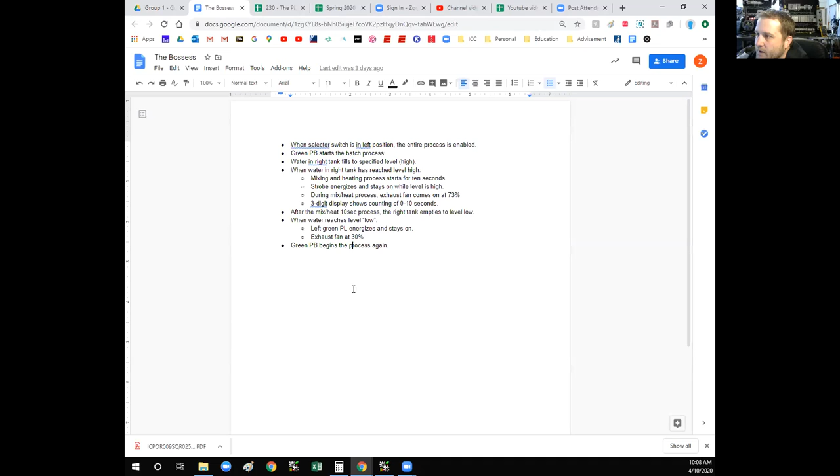I'd like you guys to come together as a group and write something up like this, and we'll go over it next Thursday. Try to get a few lines of logic written down so we can go through it quickly, because we need to get caught up with the first two groups.

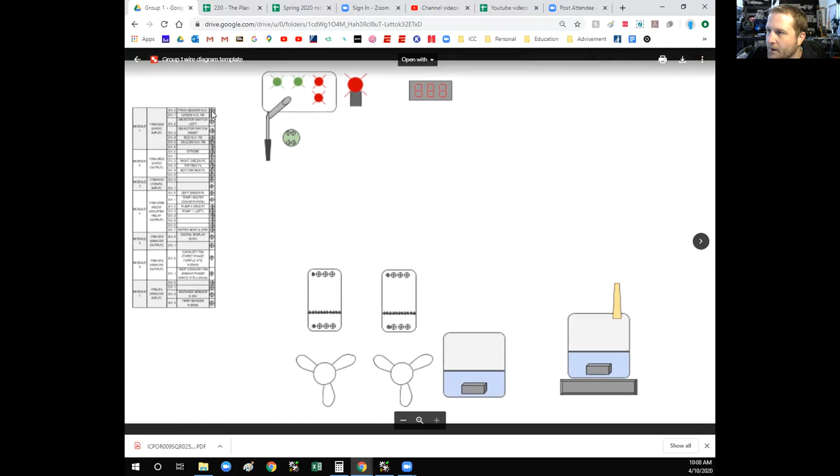When you open it up in Google Draw, you should be able to zoom in quite a bit. Google Draw is pretty easy to use. There's some shortcuts that are handy, like Control Alt plus, I think, is zoom.

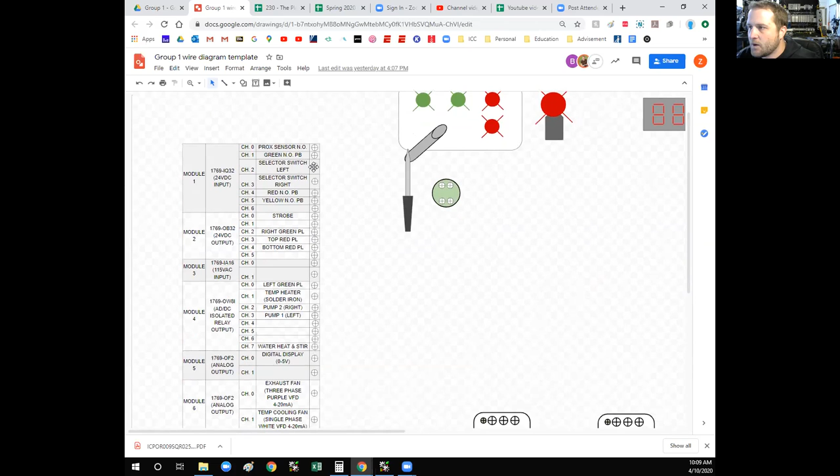You can zoom on this stuff and draw wires from the screw terminals on the PLC. And I left the drives open, so that's another thing. I'm going to add pictures of all this stuff so that, for this drive, you can see what the part number is, so you can see where to land the control wiring on here.

I'll get all that stuff loaded up after class today. Make sense? Okay, you should be able to look at the pictures and see what I put on here to use as a template. You can use this as a template for your wiring diagram.

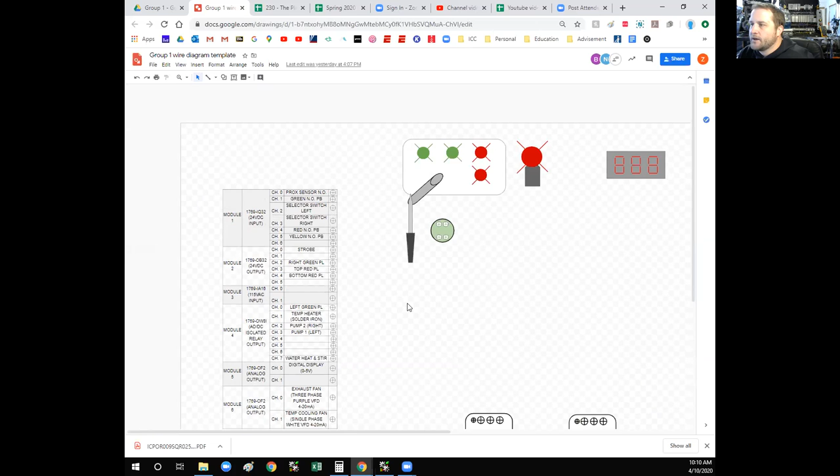So would you like us to save a copy of that on our own? Yeah, I mean, I would if I was you, but you can just save it in your group's folder in the shared drive if you want to.

Okay, so where is it at? I'm in 230, the shared drive. Yep. Electech 230, yep, and then your group 4. Yeah, wiring diagram template.

Hey Zach, you guys can- I'm not seeing it. Okay, whenever I'm in 230, I just have 230 examples of P&ID. Then I have group 1 and group 2. Those are the only folders showing up.

Oh, really? Hey Mackenzie, go to shared with me. Go to your Google Drive. Yeah, I'm on my Google Drive. Then go to- I'm at shared with me. Zach's class shared, and then I was in 230.

You don't see a group 3 or 4 on there? Let me try to reload it, but you go to Zach's shared class file. Yeah, and I'm not seeing it. You went to 230? Because I have them all here.

But Zach, the only thing is you need to share that with us. You need to let us edit that. We have the view only version. Okay, and that's what I wanted to know. So I can go here and request edit access, and I can send that to you. Or you can probably go in and change the settings on the share.

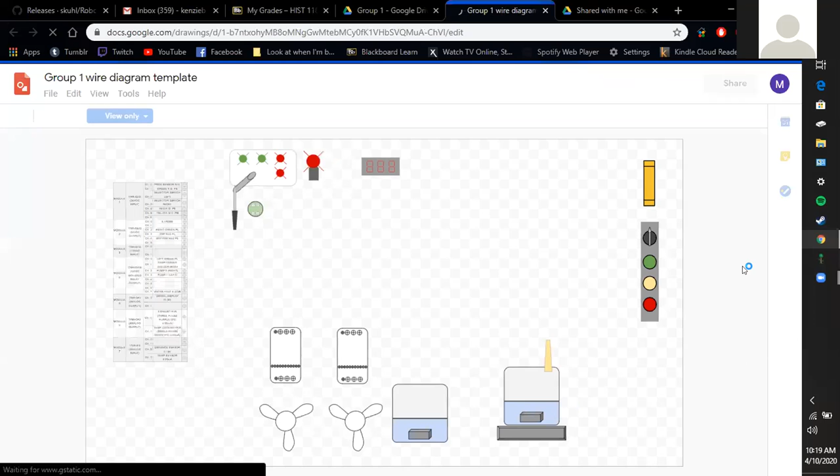Whenever I first opened these, that wasn't there. Well that's not even what I see, because there's supposed to be 3 and 4 on there too, right Zach? Yeah, you must have not shared it with Mackenzie, or she's on a different list. That's so weird.

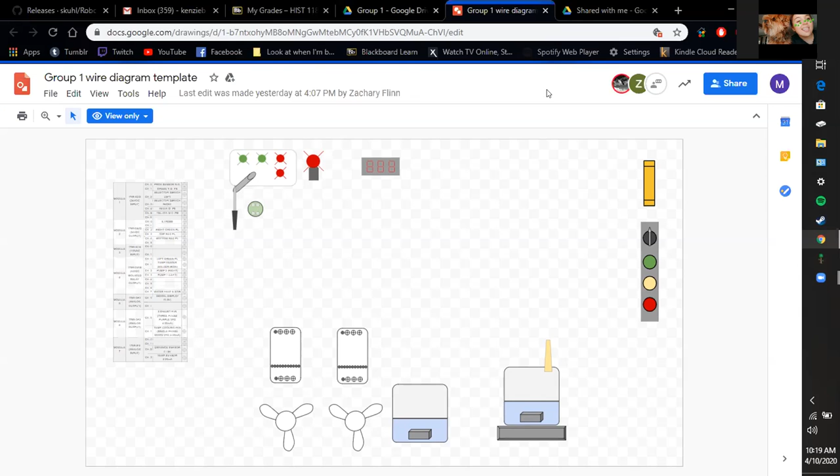And you're logged in as MJ102A. Yep, this is my Google account, cause I have my other one over here. Go back to that last screen. Okay, oh my gosh, these tabs are weird. Okay, this screen, group 1. You see where it says name on the top right? Go up, yeah, the icon next to the eye with the circle on it. To the right, one more, one more, click that. Nope, just 2. Yeah, I don't understand why that's not coming through. All right, well I'll look into that after class today, but at least you have access. You can make a copy of the wiring diagram and edit it if you need to, okay, and then get with your group and come up with a process.

Okay, all right. So where were we? Would that have been the 6th? What are we doing today? I forget, we're going to keep going on the temperature control deal.

So let's look at what we have first. And then Jacob Kaiser volunteered to do the programming today, with your help of course. Isn't he at work? No, he's here.

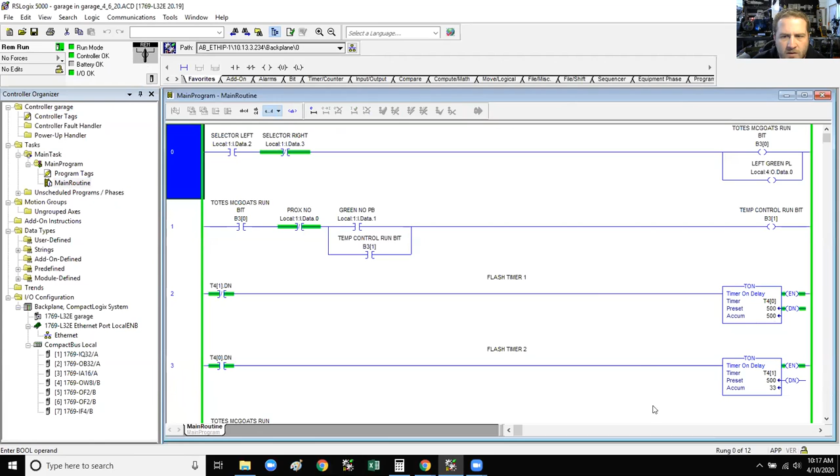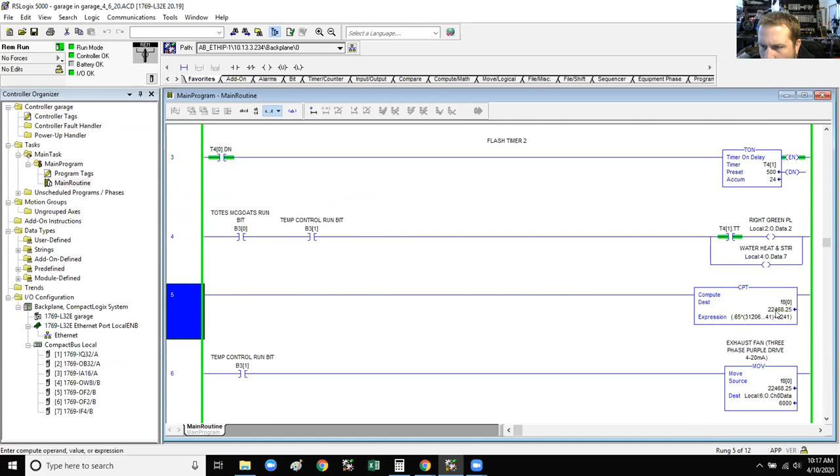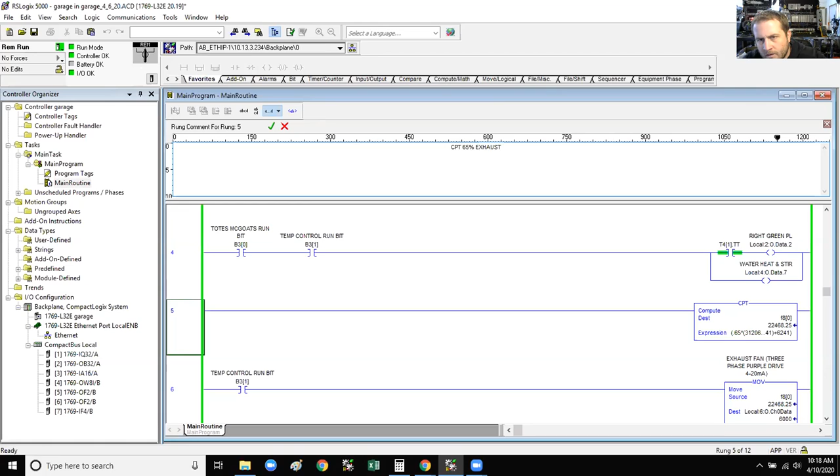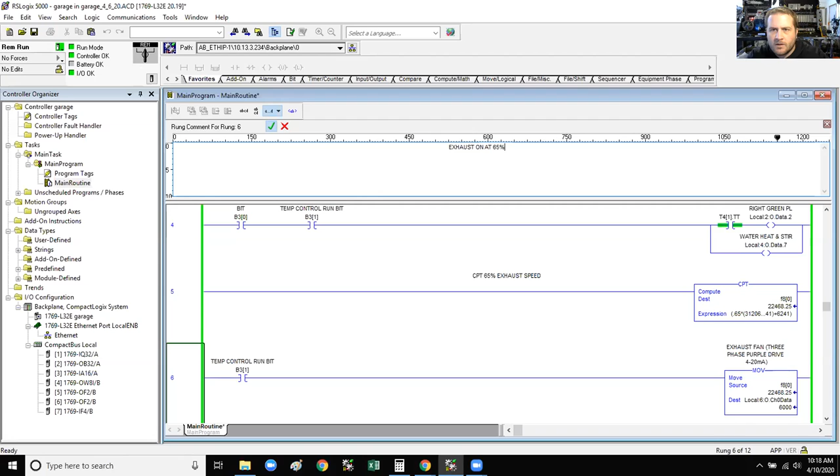So selector left, run bit, green push button. Temp control run bit. We've got a compute function in there. So this is just... we need to start putting in rung comments here. 65%. Where's this?

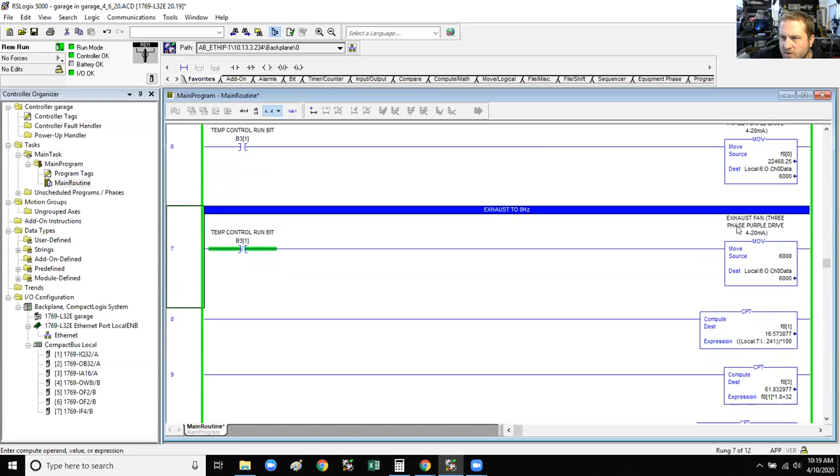Hey Zach, what's rung 8 computing? That's taking F8[1]... right, what's that one? Minus 6241, divided by... that's getting the percentage. What is F8[1]? I thought that one was the temperature. Oh, the destination is F8[1]. So local tag 7.

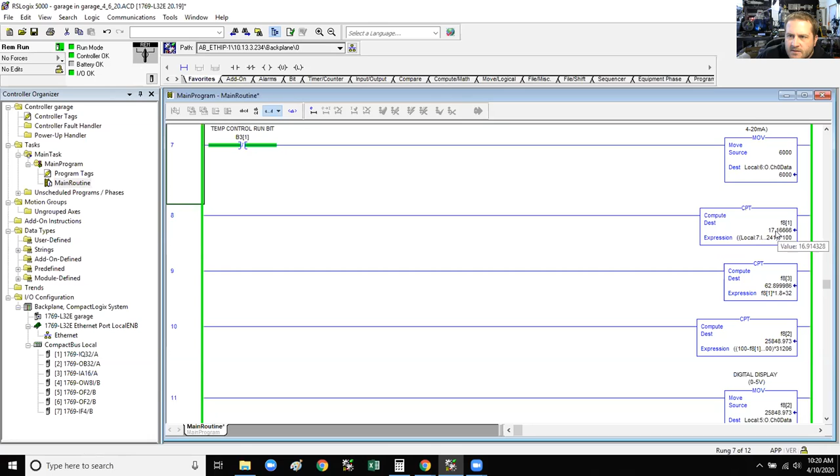What is this one? It's either the temperature or... oh, this is degrees Celsius. Okay, right? Yeah, I thought that. Then line 9 converts it into Fahrenheit, I'm assuming. Yeah. Are you guys hearing me all right? Yeah, we can. Oh okay, thought Zach was either ignoring me or... I hear you, Don. All right, I hear you, way to call him out Don. Sorry Don, I was sitting there telling you I thought it was the temperature. You just weren't responding.

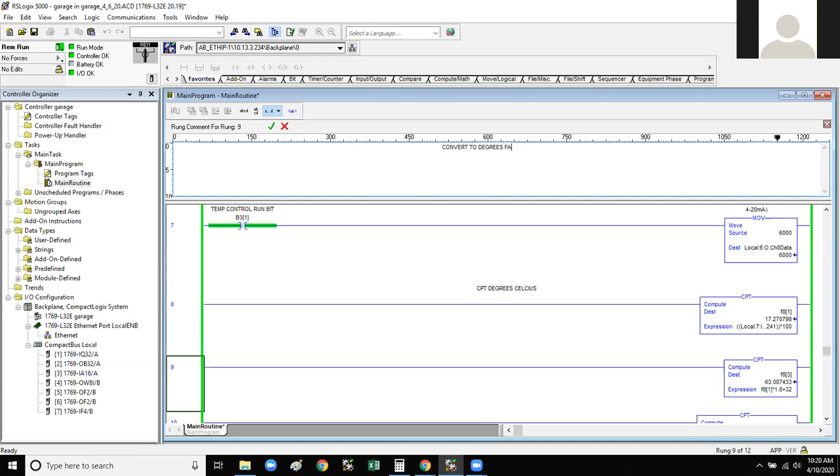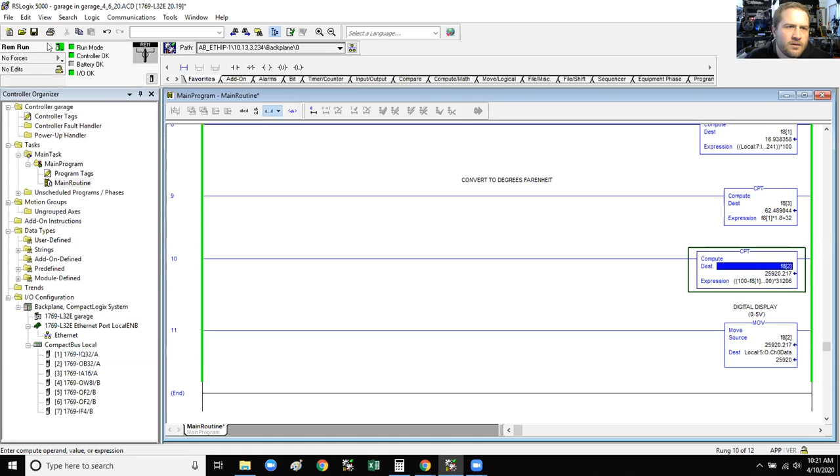Okay, so we're taking F8[2], we're taking 100 minus degrees Celsius. Oh, so this is inverting. Okay, this is inverting the degrees Celsius. Whoops, crap.

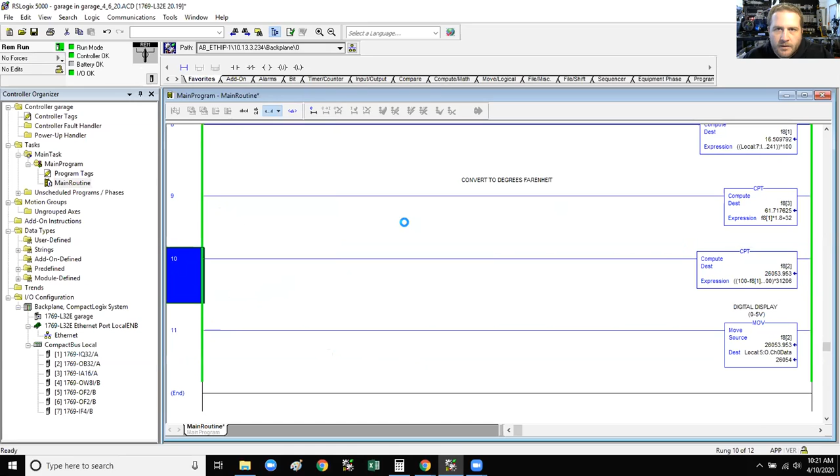Who did you get your internet from? Me? Yeah. Telstar, why? No, I've never heard of them. I was gonna suggest MTCO. Why? MTCO is fiber optics, and it's a company I switched over to, and I've had really good internet with them ever since I switched. Well, that's good.

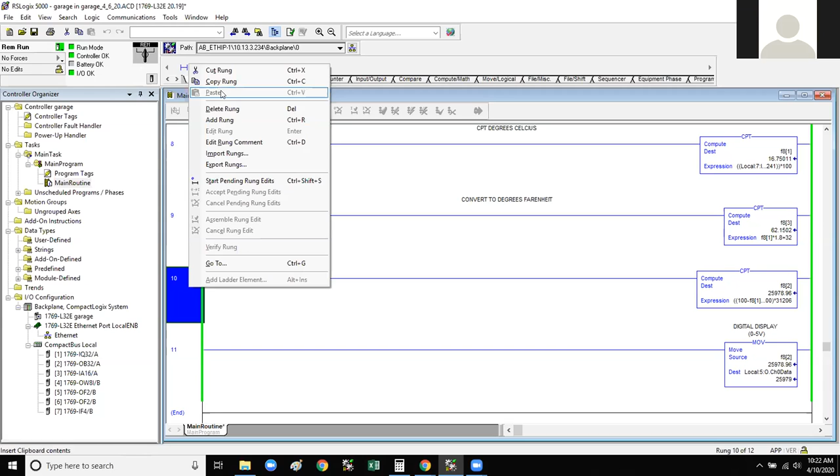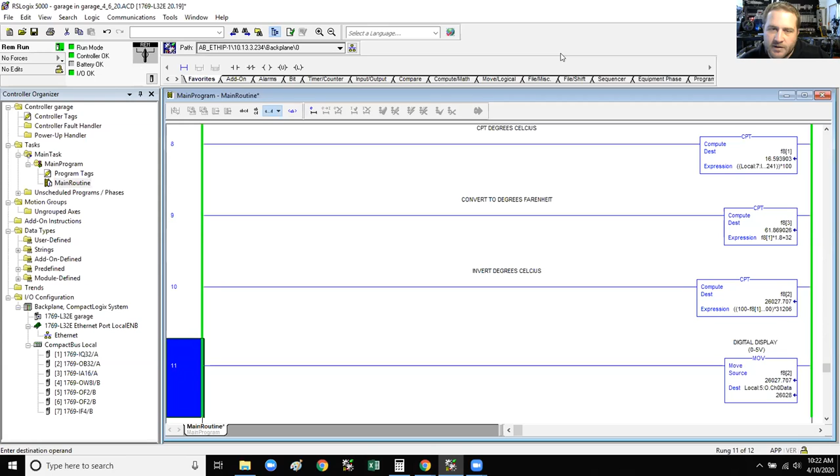What do we have to invert that degrees Celsius for? So the digital display takes 0 to 5 volts, where normally you'd have 0 degrees at 0 volts, 100 degrees at 5 volts. But this one is backwards. Oh, so when you put 0 volts on it, you see 100 on the display. And when you put 5 on it, you see 0. So you have to invert that thing so that way it still reads correctly. Yeah, makes sense.

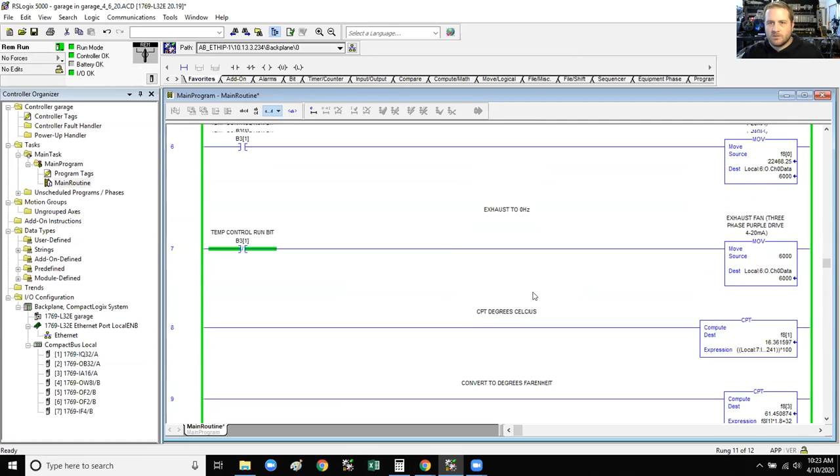All right, so this thing's running. And it is showing 18 degrees Celsius, which is pretty close. Program's showing 16.5 degrees Celsius.

So, good to go. So what else? What else should happen? We turn selector left on, the green pilot light comes on. Cool. Where's that turned on? I can't see that, I don't think.

Better? Yeah, this is off. Oh, I see. Okay, selector left, and then I hit this, and the heat and the stir are coming on. And the green pilot light is blinking. So that's where we're at so far.

Do we have a stop button in there anywhere? Or is it just the selector switch? I'm pretty sure you added a stop somewhere in rung 1 or 2. Oh, it's the prox. Yeah, it was the proximity switch.

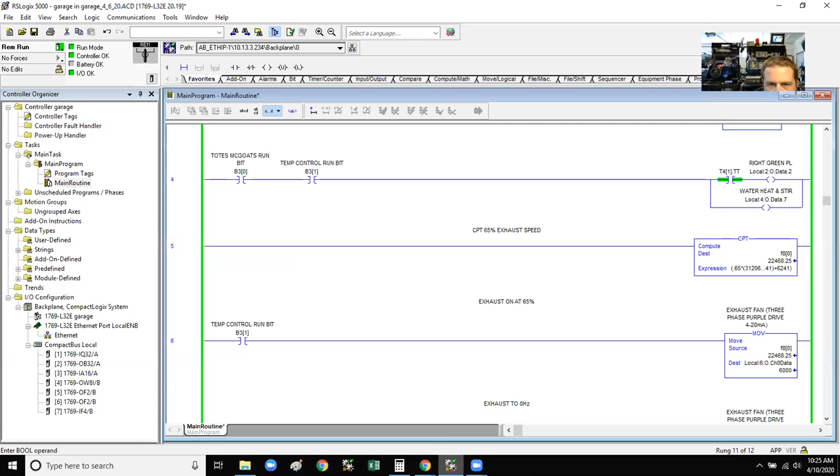Okie dokie. There, Jacob? I'm here. All yours. Have fun.

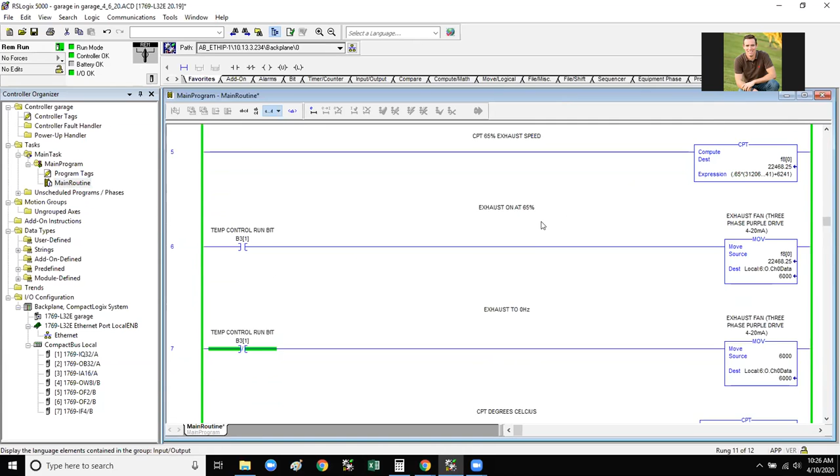What do we got to do in the process yet? What's the last thing we did? Last thing we did was got the digital display working. So right now we have to get the... we have to get...

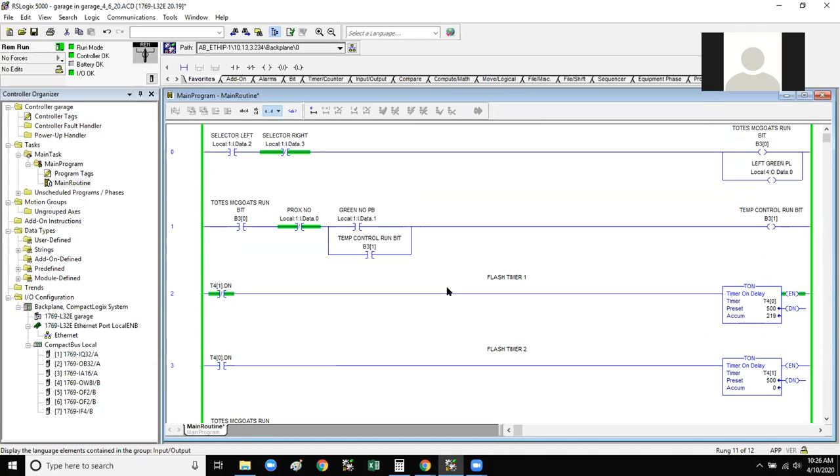We have it in Fahrenheit, right? I think we have it in Fahrenheit, so we just need to make a function that turns on the red pilot light. I'm just reading the next step word for word.

So the digital display shows the temperature in Celsius from the thermocouple in real time, and then the next step would be whenever the heater soldering iron is on, the bottom red pilot light flashes at a rate of 0.5 seconds. Shouldn't we get the soldering iron and the cooling fan in first, though?

Or would you rather go with the... Is the heater on right now? No, we don't have a heater function or a cooling fan function. When do we want the heater to turn on?

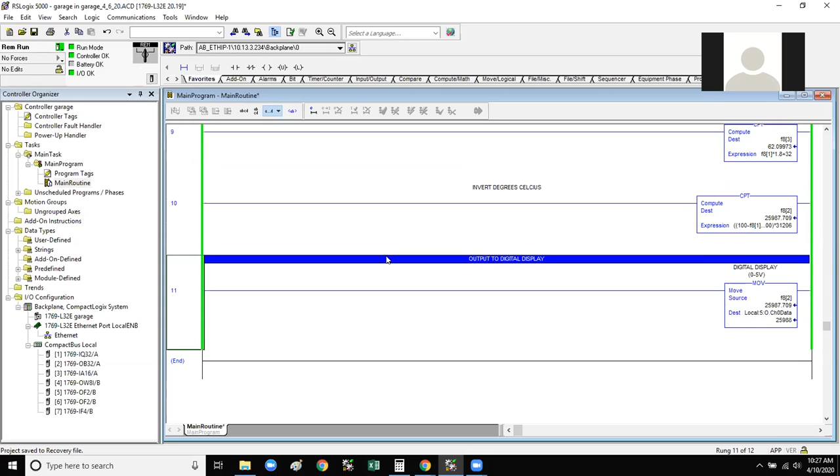When it hits 79 degrees Fahrenheit, we want the heater to turn on. What is it at now? It's there, right now it's at 62 or 61 degrees.

So we want the heater to be on right now until it goes up to 72 or 79. What? 79. Yeah, so the heater needs to be on right now. Well, yes. Can I put my 2 cents in? So we need to make a rung with the heater output.

I think that is a no. I missed it, what was the no? Please add your 2 cents, Zach. Zach asked if he could add his 2 cents in.

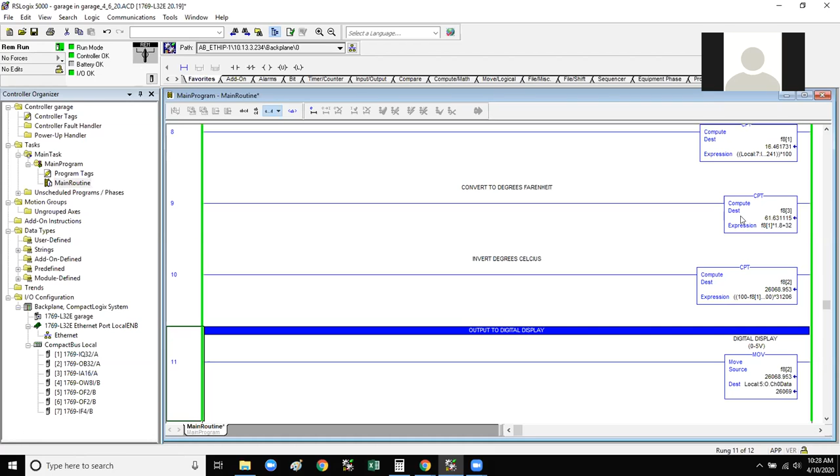I would do a couple compute functions to calculate what 80 and 120 degrees Fahrenheit is in Celsius.

Why wouldn't you just use a calculator for that, though? You can. Somebody can do the math, and we can put those numbers into an F8 if you'd like. Should we do that together on a whiteboard? Sure, all right.

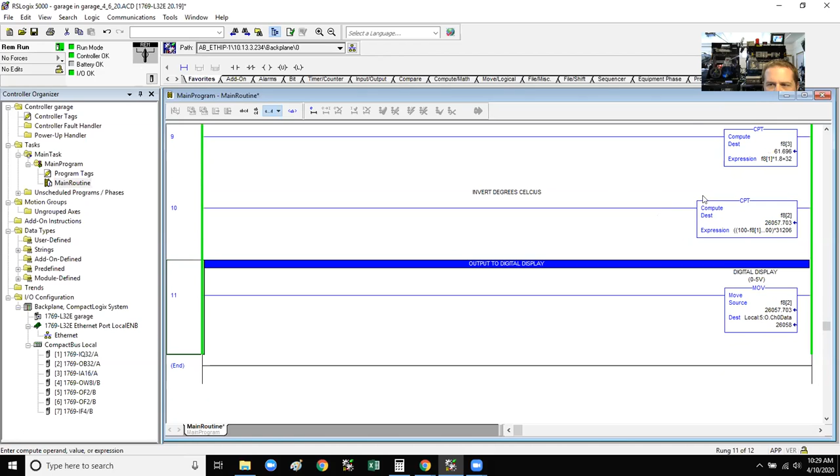I got it, Jacob. You don't have to do anything, just let me have the mouse. Okay, he's like, I don't wanna.

So what we want to do is have 2 F8s. I don't know what the next numbers are. 4 and 5. Uh-huh. And F8 5.

We need to figure out what 80 and 120 degrees Fahrenheit is, right? Yeah. So, 0 to 100 degrees Celsius is on the PLC going to show you 0 to 31206, 6241 to 31206. Those are the numbers, right?

Yeah. Hey Zach, what? I cheated. How'd you cheat? I used Google, Fahrenheit to Celsius, they have a little app that just tells you. So Celsius is 49 degrees. 49? Exactly? Well, no, it's...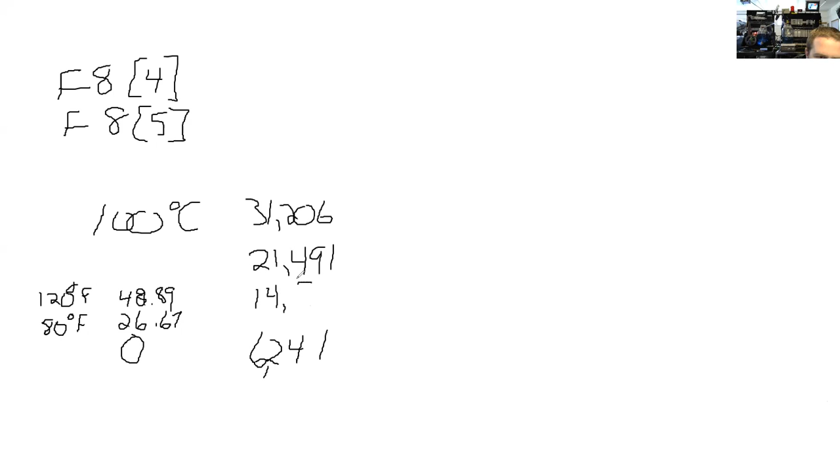Okay, well thank you for saving us a ton of time because I forgot that we did that. So these are the two numbers we need. Got them written down, Jacob, or somebody got them and you can tell them? I got them written down.

The 21,491 is the 120 degrees, and the 80 degrees is the 14,548. So all we're going to do is go into the tags.

We should probably put a rung in there with move, so that every time you kick this thing on, you're moving these numbers into F84 and F85. Once F84 and F85 are designated as these numbers, then you can use your less than and your more than to control the temperature. Make sense?

I'm not sure why we got to put that into a tag, the 21, just so that we have it for other uses?

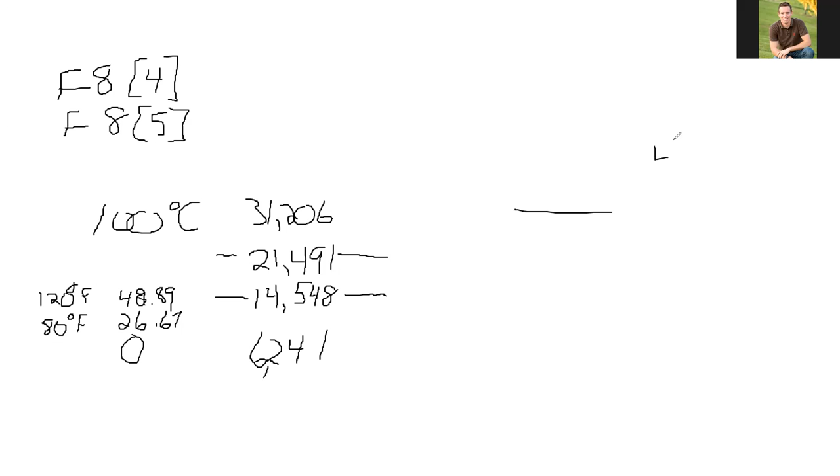Well, because at some point we're gonna have a less than function, right? I don't remember the number, LTH or something, less than. So we're gonna tell it if the input...

I guess we don't need to assign them, do we? I mean, we need to put the input. We'll have to have that float symbol, the F8, and then we'll just put in: if it's less than this, if it's less than 14,548, make that rung true, and then move it, move that number to the heater I guess.

Or no, we'll have to do a one-shot rising, so that way if that rung comes true, it'll turn the heater on, because the heater's a discrete output, right? Yeah.

Okay, the way I'm understanding it is the less than bit, when it hits 14,548, below it, it'll turn on. And then we can put another one for 21. So is your input one the temperature?

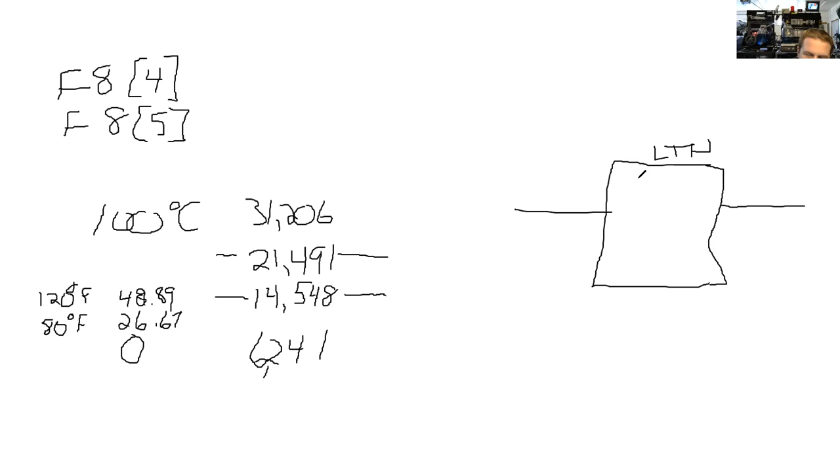Is your input less than 14,548?

Is it just me or your handwriting got a little worse, Zach? Sorry, I've been drinking.

So if this is true, if it's less than 14,548, then this rung will become true. Basically we just need to have an output then, and then we'd have the output of the heater, right? Yep, then that'll stay true.

That's going to have to be, we're going to have to have that stay true though, because as soon as that rises above 14,548, it'll turn the heater right back off. So we'll have to have that stay on somehow. We'll have to seal it in until it gets to 21,491.

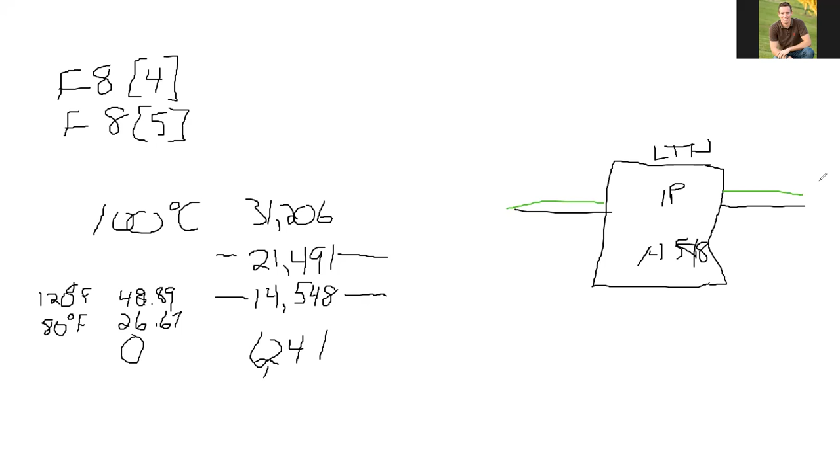And then we'll have to turn it off then. That actually makes sense, use the higher number for this. Or somewhere in the middle.

I don't know, we'll just have to write it and see how it behaves. There's going to be some kind of lag there. Because if you have this thing... no, that should work.

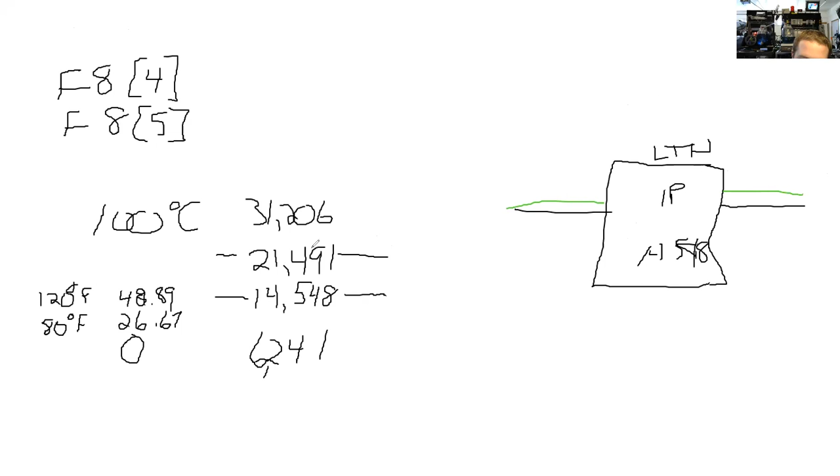When do we put another function for the 21.4? Well, you're going to have another one that's more than. So if you have, if it's more than 21,491, it turns the fan on at whatever percent that is.

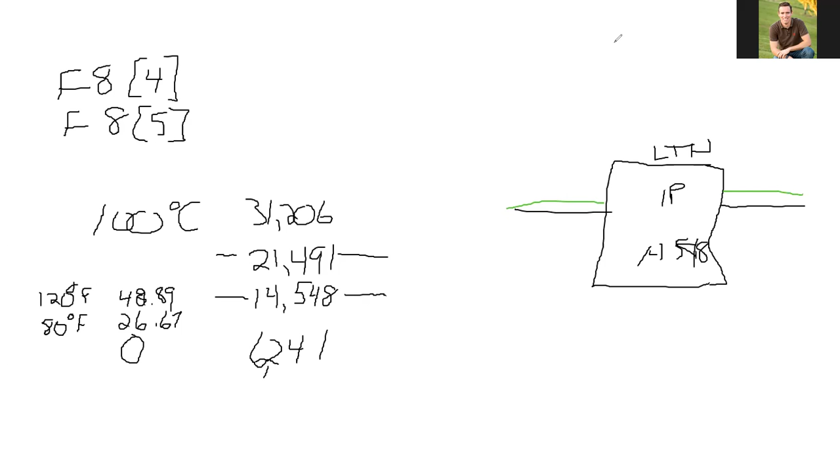All right, right? So Zach, how... I have done it in the past in the 230 trainer is I just made it so that once it got, I use that less than symbol to turn it on.

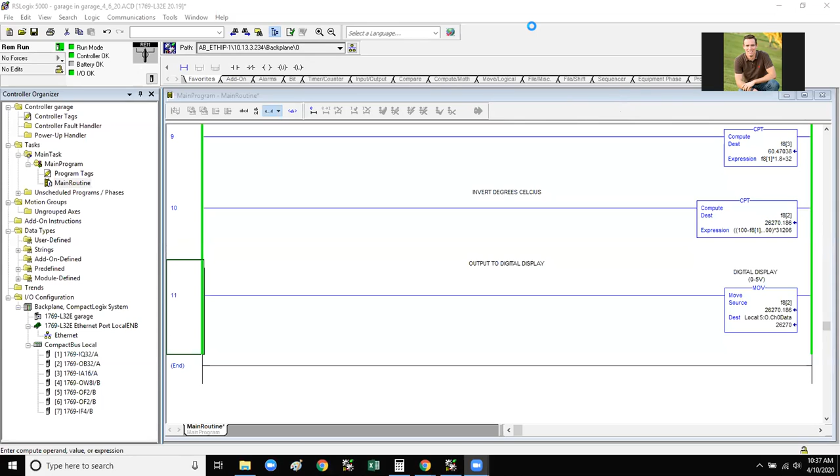Once it's on, I actually put a sealing contact around the entire less than symbol that would bypass that less than until it got up to the high limit, and then I'd have an examine-if-open symbol in there, and once the high one was true, it would then drop that whole low rung, and it would shut down the discrete output. I think that's how I did it in the past, so I don't know if that would work. I can give it a try, or how would you do it?

Let's try it, a lot of times you have to put it into action and see how it behaves. Okay, so we don't have an output or anything yet for the heater, correct? Nope. Okay.

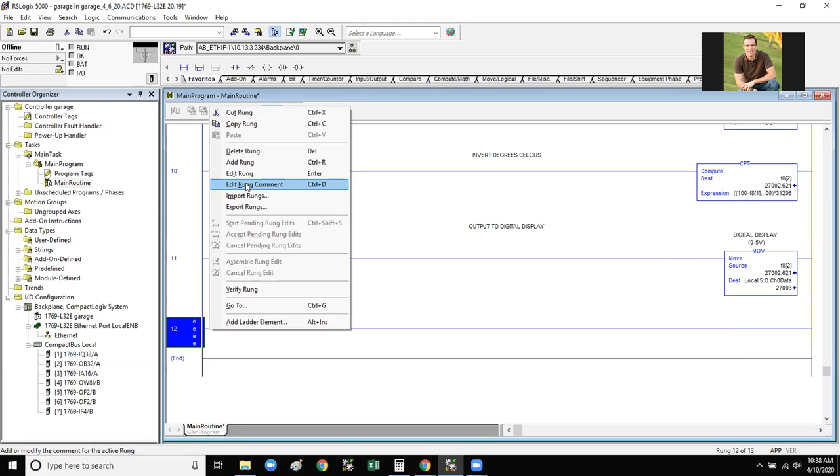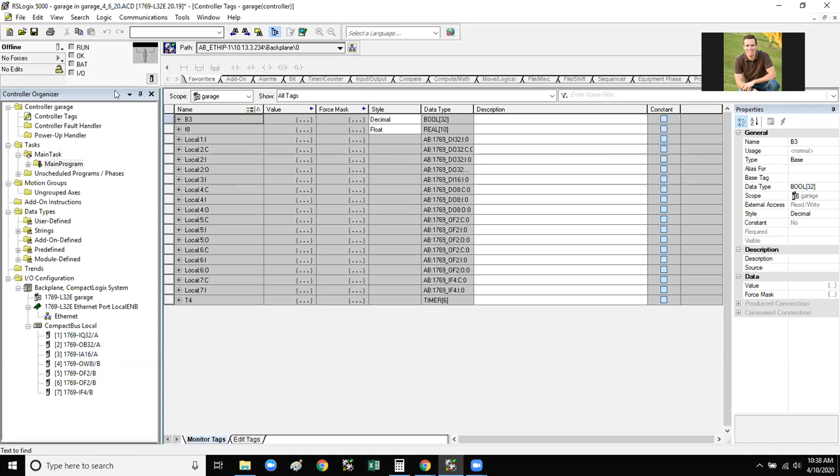Which output is that now? Actually, scratch that. How do I get back to... How do I get back to my main program?

Drop down on the main program. Main routine. There you go. So if I go, is there a way we can do that controller tag? There we go.

All right, now help me out, guys. Which discrete output is that heater is? I don't really know that at all. 4-1.

So now it's gonna be this one right here. So this one here? Yep. Yep. And heater, okay. Now we go to.

Do we have like an e-stop control bit we've been putting on all these rungs that are running things, or are we just not worrying about that for now?

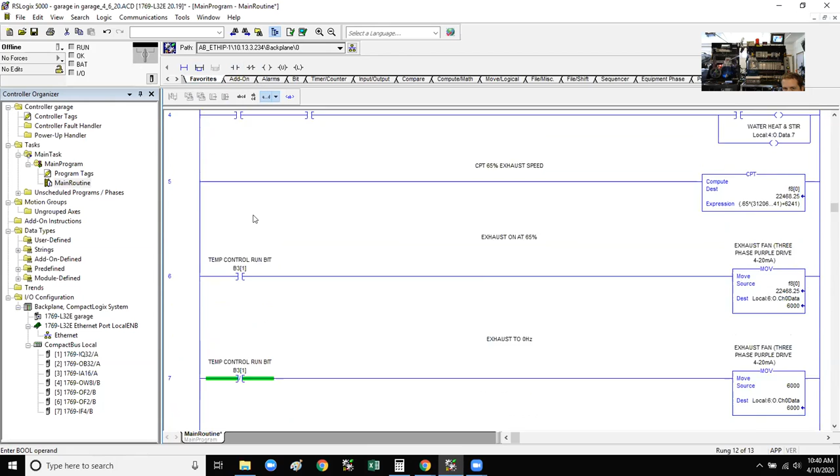Well, you don't want that one. Yeah, you're right, I'm always right. I'll delete that, delete that instruction. Because that e-stop's probably normally closed.

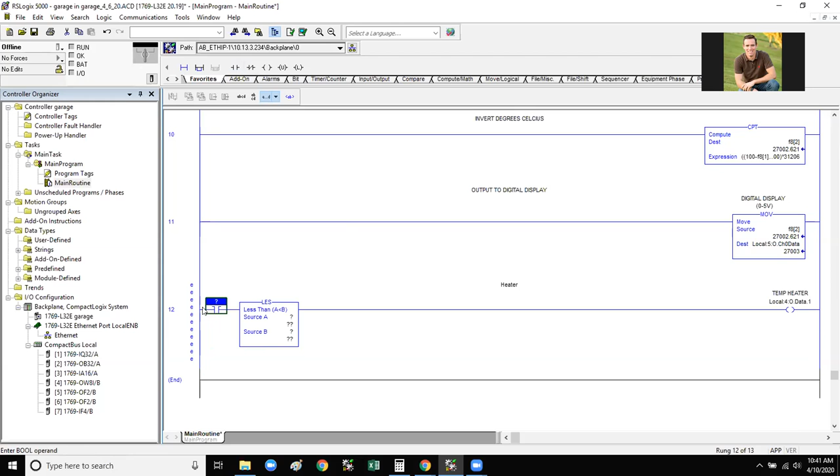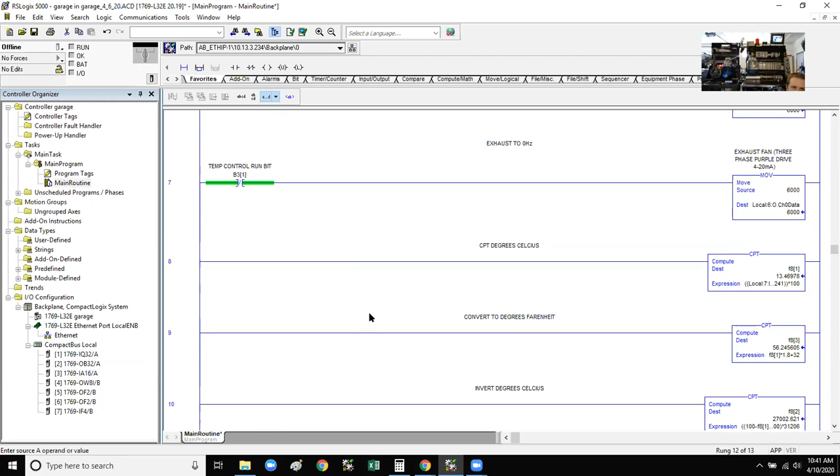Oh no! There we go. Is that right? Yeah, but go back up to that rung you dragged it down from. Make sure you didn't move the whole thing. In here. Okay, all right, you're good.

All right, now our source A is going to be inverted, not that one. Compute degrees Celsius, this one right here, right? This f8[1]. Am I thinking right on that? Nope.

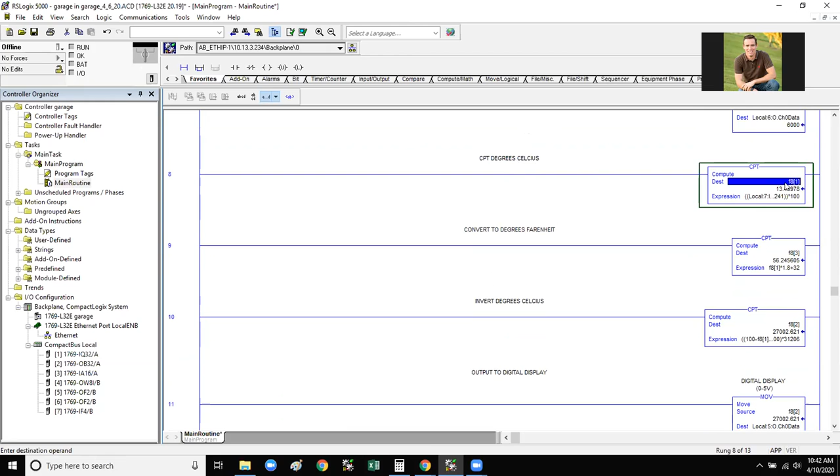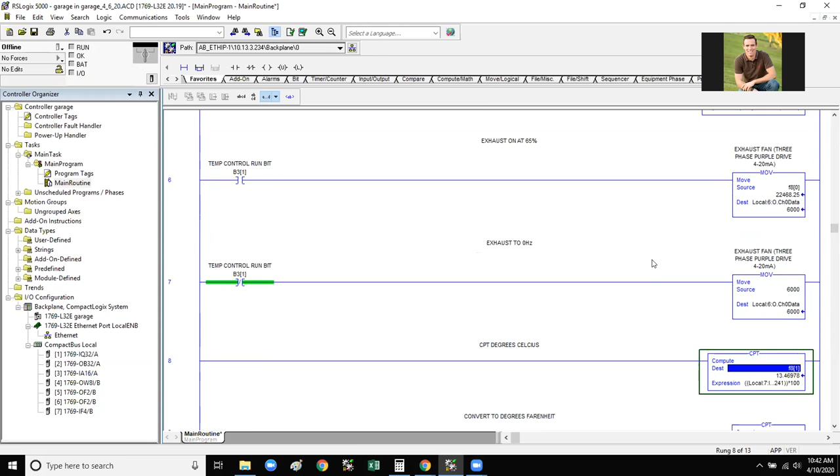Because that needs to be the temperature sensor of the water, I guess. No, the air temperature. Oh, the air temperature.

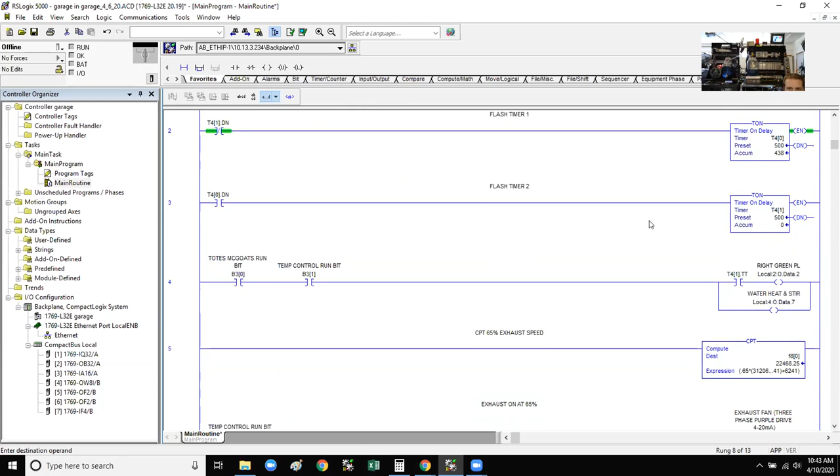Do we use, where's our temperature sensor, guys? Somebody have the list of inputs and outputs open? I think it's this here, 7. If I had a guess, I would say it's local 7.1. Give me a second, I just gotta scroll to it.

Because of this and this here. 7.3. 7.3. 7.3. That's the temp sensor. Sorry, I don't have the Google Drive open. I've just got it all written down, it's like 3 pages back in my notes.

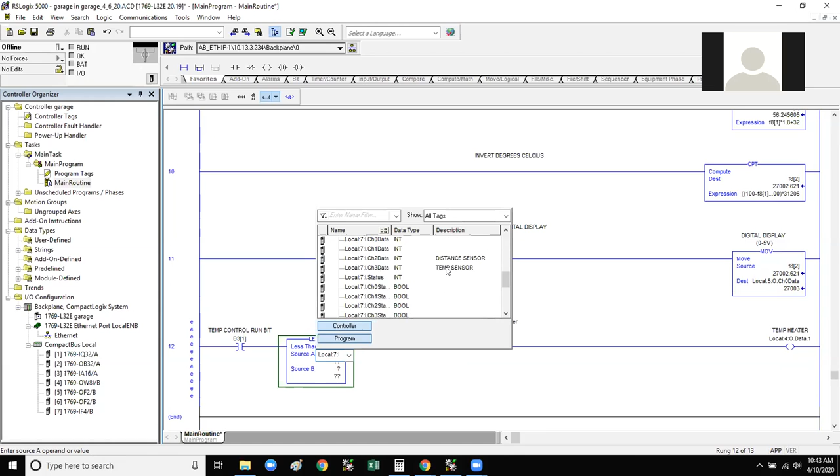Now we're talking. Anyone got that number? What was that number? 14,590. 14,548, right Tyler? Yeah, 14,548.

Okay, so that should be true right now. Can we run that, Zach? Yeah, if you want. Let's, I don't remember how to do this now, it's been a minute. We got to go to... let me download this bad boy.

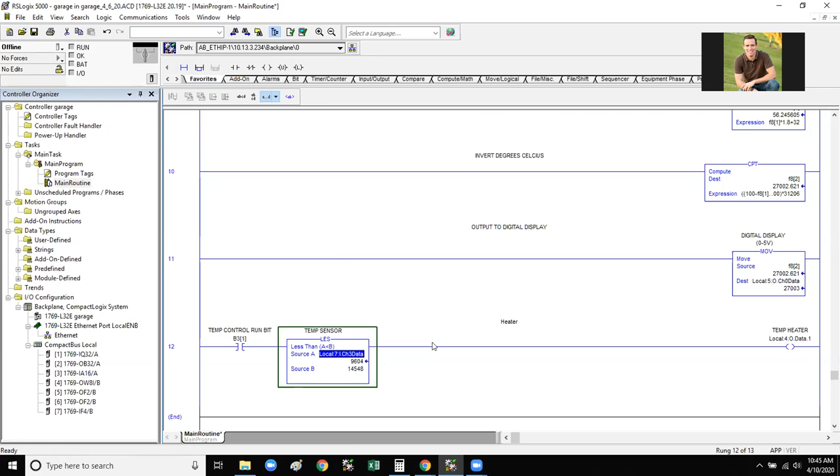Hey, you know what? Before we run it, let's put the pilot light in parallel with it. Hold on here.

Okay. So that way we can see which pilot light we're turning on without me putting my finger on a soldering iron. You know what I'm saying? I know what you're saying. No, could you demonstrate? Does anyone know what pilot light is open?

So that's 4 for our discretes. Well, red we were gonna use later in the process, but it's not used currently. All the lights are on 2. Oh, all the lights are on 2. Let's see here. Thanks, Brent.

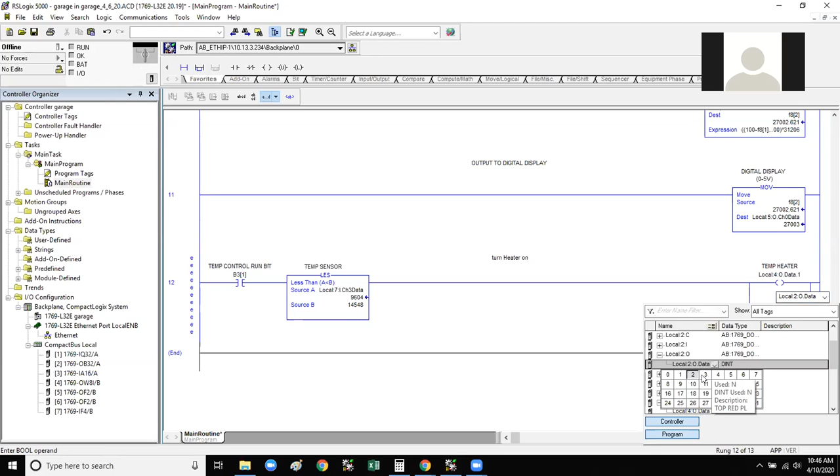Not all of them. Module 4 has the left green pilot light. Oh yeah, but I think the right green pilot light hasn't been used yet, 2.2. Used. We need the bottom red pilot light.

Bottom red, the red one you want to use? That's just what the 2-4 instructions say. There it is. We can come back and put the flasher on it, but for now, just to test it out, we can see when the output is on by this.

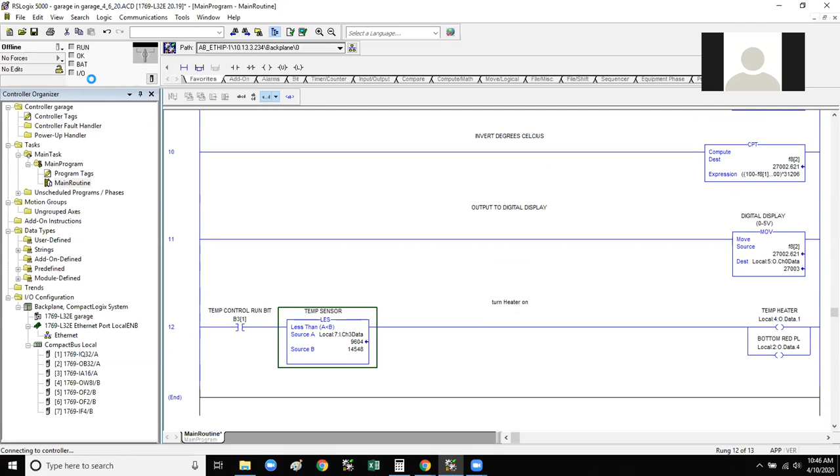All right, let's watch some sparks go. I see nothing. Give me the mouse, give me the mouse.

You see me? I see you. Yeah. Which light is it working? I don't know which light's which. I have to turn it on first, remember?

Oh, so what is our degrees Celsius? Nathan, you Googled it, what is the degrees Celsius? 20 something? It's 26.67, I think. Let me check again. Yeah, 26.67, 26.67. Okay, and remember the display is reading degrees Celsius.

So if we get over 26, you should see that. Sorry, I was muted. Right, when I hit, so this is process on. When I hit the green button, the green light should start flashing and the bottom red light should turn on. And then once the temperature gets above 26, that heater should turn off, right?

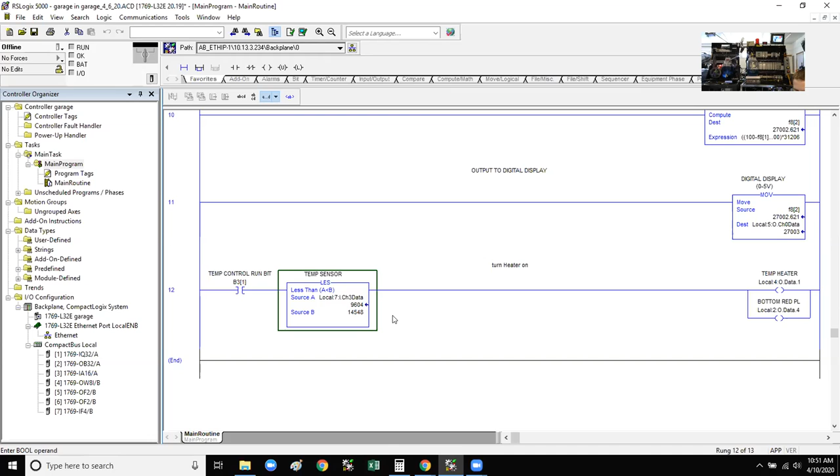Where do I start? I gotta add a new rung. Then I gotta go to timers and counters. Might as well add another rung.

Why can't I go to timers and counters, Zach? Oh, click on this, come up here. I think I can drive too. You don't have a rung selected. There we go. All right, Zach, can we both run this? No, I feel like we can't both run because I'm running a mouse right now too.

No, it's on Nathan. Timer on delay. Who are you talking to? Anyone at all? Yes, timer on delay.

Push, name it flash. Hey Zach, how long of a flash you want this thing to do? How about flash? Let's do heater on flash. Such a boring name. It'll be nicer when we're troubleshooting when it's not working later on.

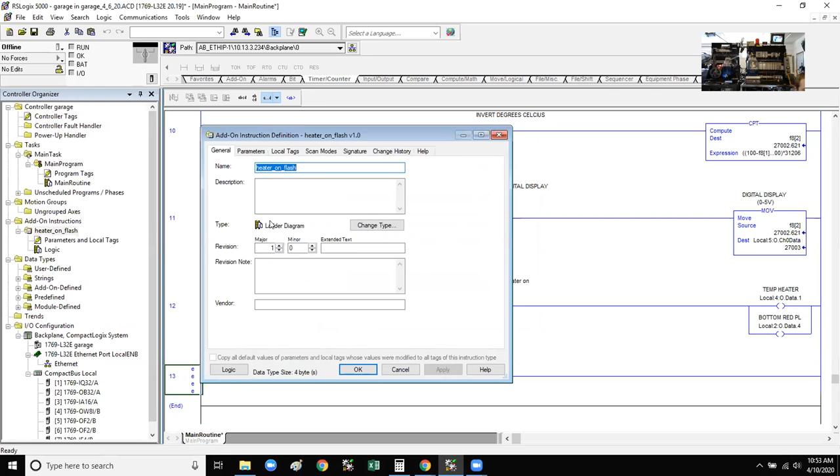Hold on, did you... I'm telling you it's not on. What the heck? Hey Nathan, go with their timer on and drag it down into the actual rung. There you go. Yeah. Now double click on that and go select the next open timer time bit.

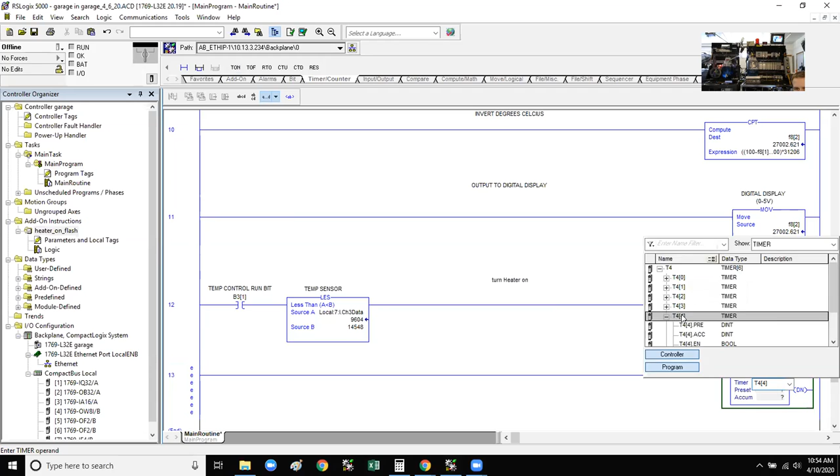Which timers have you guys used so far? I don't know, I'm gonna just do 4 to be safe. Now let's label, we can go into that tag and label that. That way we don't have to worry about reusing it again. That's fine, whatever, that'll work.

No, I could look it up, I just forgot how to do that. Yeah, you have to go into edit tags if you're gonna name the timer. Yeah, that's what I thought. And I'm looking for edit tags. Controller tags up at the very top.

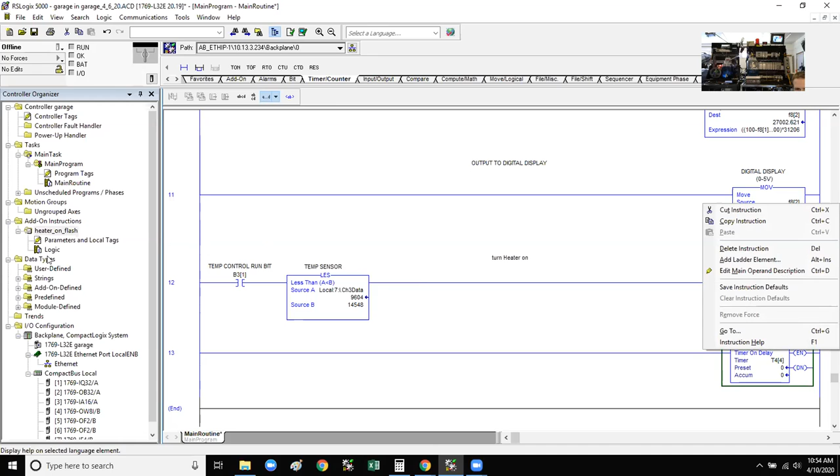Hey, sorry, I heard my door open and it was campus housing. They didn't announce or anything, it scared the shit out of me. So I heard my name getting called, but I couldn't say anything because I was in the other room. Tags at the bottom.

Down a little more, a little more. You have to go to edit tags if we're gonna label them. Which is down here, right beside the bottom of the screen. I see it now, there we go.

Now we can put in a description. Just write heater flash, and we'll use 4 or 5 for the others. Do that, then do the same thing for timer 4-5 as well. What are we gonna name that one? Let's do heater flash 2. That'll be fine, or heater flash 1, or whatever.

All right, and then how do I get back to the main program? Main routine. Oh, I see it now. Is it the main program right here? Yeah, main routine is down then. Oh, nope, nope, my bad. Go to main routine, expand that file in main.

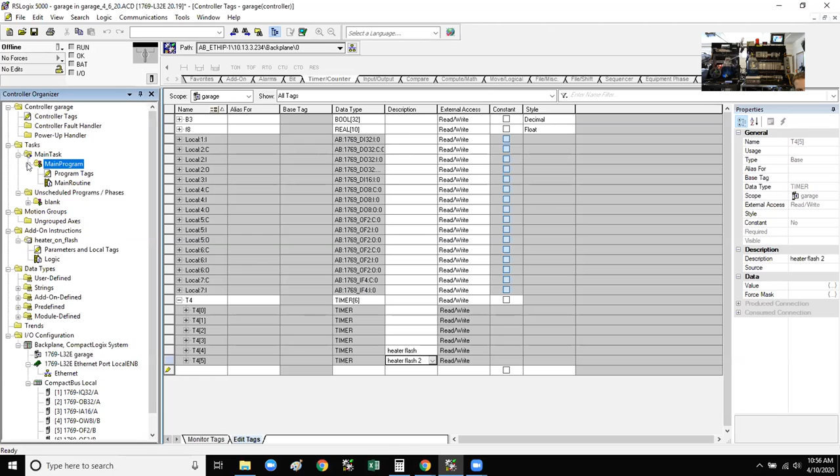Yeah, right program, back up where you were, Nathan. Go to main program and Tasks, put the little plus button. That tiny one? Main, nope, next one, program up, main program. Oh okay, main routine. There we go, sorry guys. There we go, and heater flash.

All right, so now what do we want to do? Zach, what kind of a flash? Like on for 1 second, off for 1 second, or what? Somebody have the assignment up? It flashes at 0.2 seconds. Whoa, that's fast. Thank you, Brayton.

Okay, so we better preset that for, what is it? Gotta think about how to do the alternating flash. Timer on, timer timing - that needs to, wait, do you have a second timer on delay? We have one labeled, we haven't made it yet. I'm trying to remember how to do that now, because each of the done bits has to control.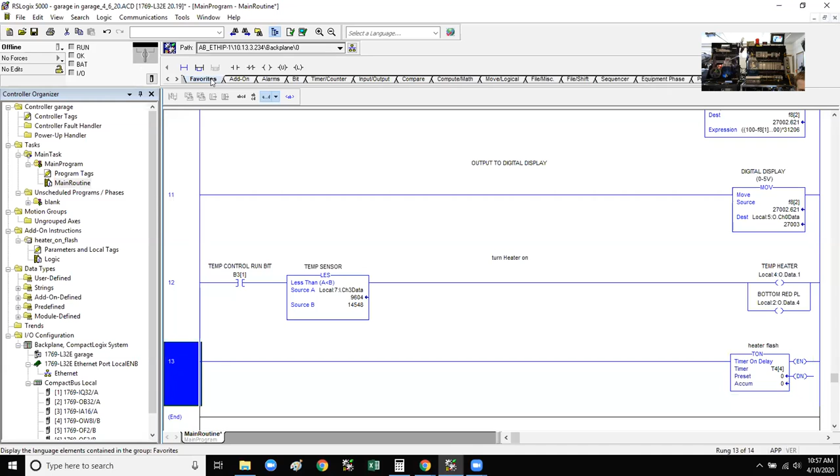So that's going to become true, that timer needs to start. So preset that timer to - what are these units in? These are in 1/10 of a second. Or no, they're not.

Let's try that at 20, put that at 20, I think we can actually adjust. No, by default it's in milliseconds, so we need to put 200 in there. Yeah, 200. In other words, if you had the number 1000 in there, that would be 1 second.

Yes, okay, now let's go get another timer on delay. Are we gonna put a new rung? Next rung down. Yep, so yeah, new rung.

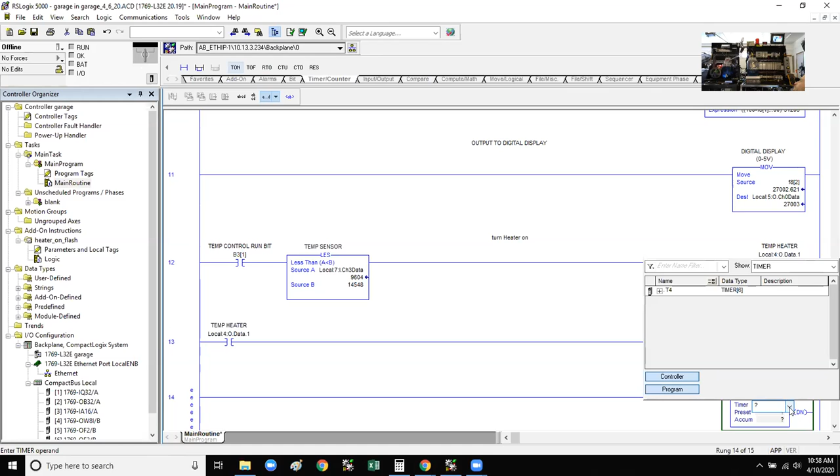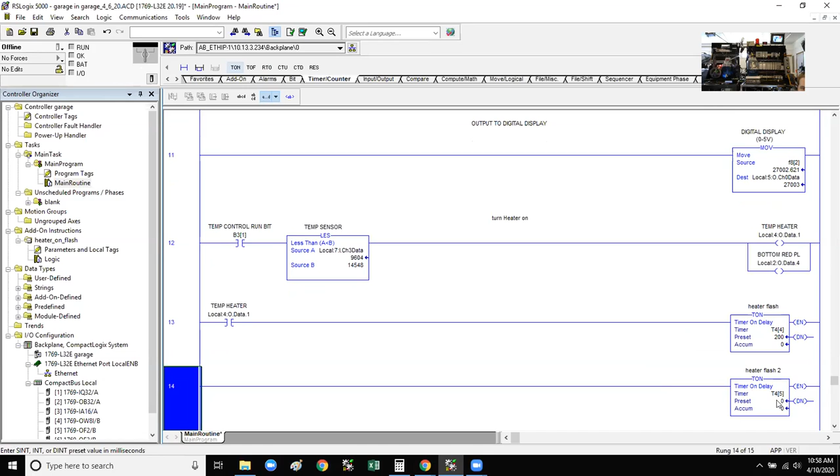Now what are we doing for that one? So that's gonna come true for timer on, that's gonna be timer timing. Wouldn't it just be another 200? Because you want to flash on and off at the same amount. Right, yeah, another 200, and then you only power the light with one of the two timers. Yeah.

Then you have to have a normally open for whenever the first timer on delay is done. Yes, there you go.

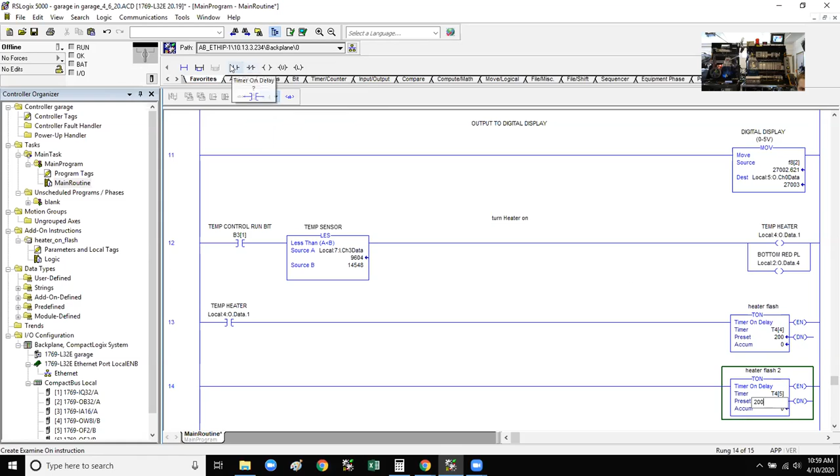You gotta start - oh, that's a bad one, sorry, thought I could. If we double click on there, then go to timer. There you go, yep, now go to the timers. Go to timer 4/4.

And then we can do the timer done bit. Yeah, yep, you good, that'll come true. I was trying to drag the done bit all the way down. That was my bad, that's my bad. You gotta put an examine if open on line 13 there, or normally closed, whatever you want to call it. Tie that to the done bit of.

4-5. What do we want to put it in, series? Yes. I meant series, parallel? No, it has to be series. Has to be in series. Okay, double click on the question mark.

Well Nate, do you understand why it has to be series instead of parallel? Yes. Don't we want that one instead of the normally closed? No, it has to be normally closed. All right, then I don't understand, but that's okay.

So that's going to initiate that timer, right? And then when the other one is running, it'll shut that section off. Yeah, so basically Nathan, that first flash has to be true until this second timer is done running through, because that way it'll shut it down, and then it'll just sit there and alternate.

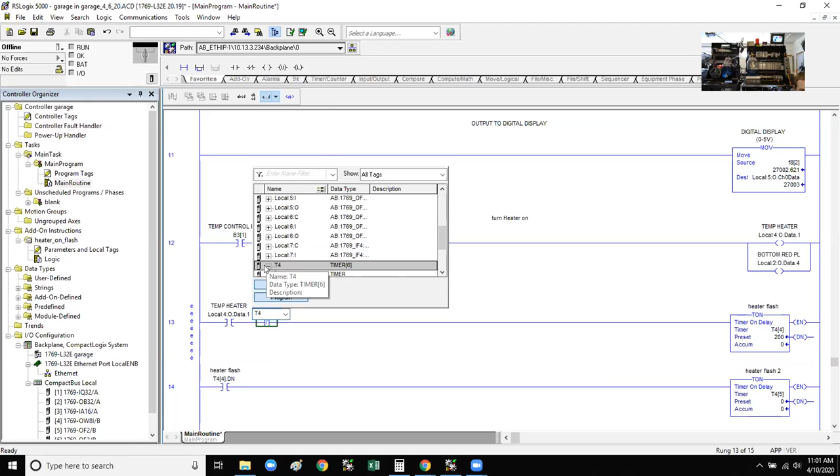And now we need to have an output with our light on it, which will be controlled by the timer timing of one of the two. Yeah, of the first one, I think. It doesn't matter, I don't think, but we'll do the first one, it's fine. So what are we doing?

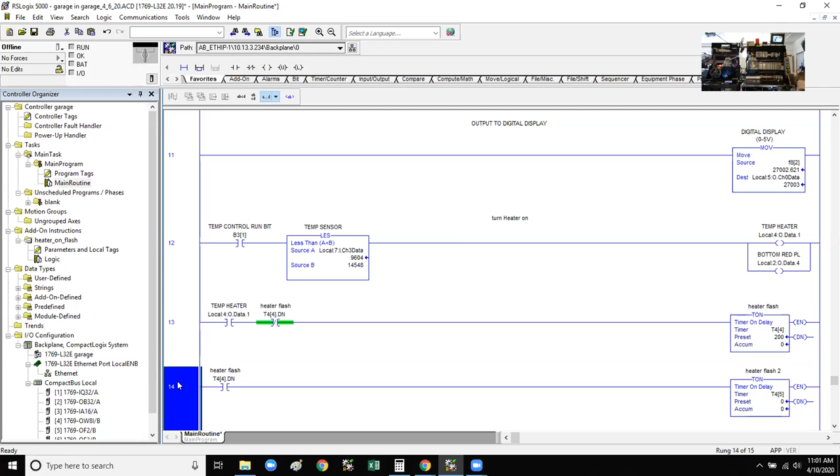Drop another rung. And then you got to put that output in, and you got to put an examine if closed in. You already have the red pilot light in there. Oh, do you? 12.

Okay, so let's go to rung 12 and see what that looks like. I didn't realize that was in there. Sorry, Zach. Okay, so basically, put an examine if. Yeah, that one right there. Yeah, there we go. Then turn that into timer 4-4 timing.

What do you mean enabled? Timer timing. Well, whatever they call it, I'm not sure what they call it. Yeah, the TT. Yep, yep.

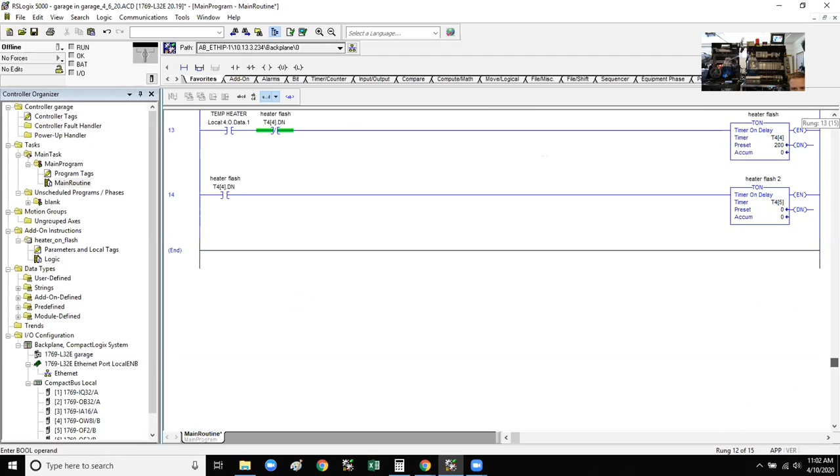Now think about this, think through this before we give it a try. Do we need a reset scrolled down there? Nope. Oh. You only need resets if you have a cumulative timer, or what do they call those? Retentive timers. Yeah, you only need a reset for those. All right, one more thing before we try this.

On rung 13, you don't need that temp heater in there. I don't? Nope. Rungs 13 and 14, their only job is to flash bits on and off at 0.2 seconds. Yeah, but isn't it when the heater's on that they're supposed to flash?

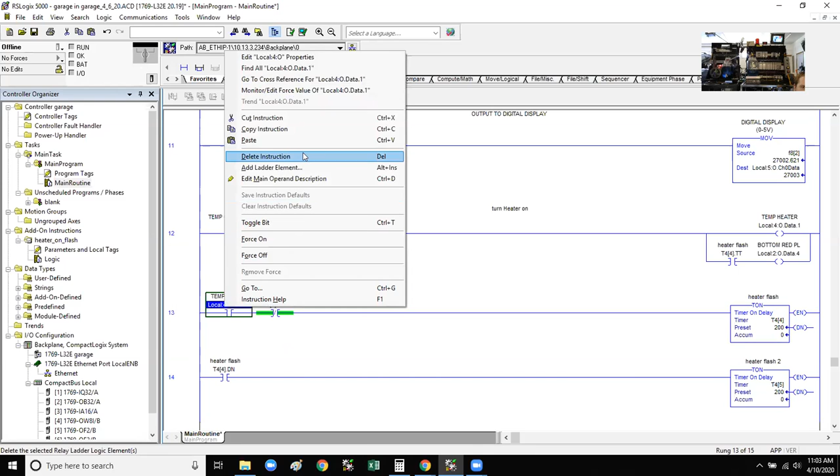Nathan, Brad, and I made this flash the entire time. It doesn't matter, we're just using them whenever that pilot light is on. Right, because of where you put it, you're only ever going to see it when it's enabled. Fair enough. Yeah, and Brad, seeing rung 13, the only time you're going to see that actual light doing something is when rung 12 is true.

All right, so let's give this a shot, see if it's working, and then we'll stop there for today. Pick back up on Monday.

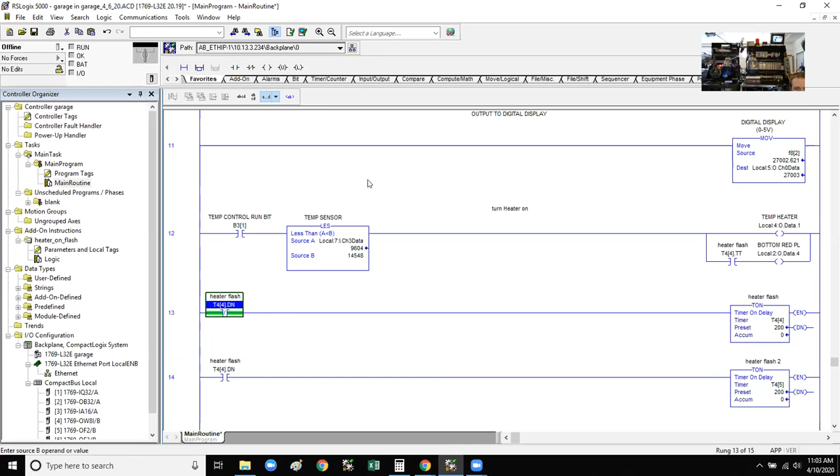How do I download again? File. Nope, go back up. It's on offline, see the offline? I do. Click that and go to download. Download. And also, we don't have the right timer done, I don't think, on rung 13, but we'll try it.

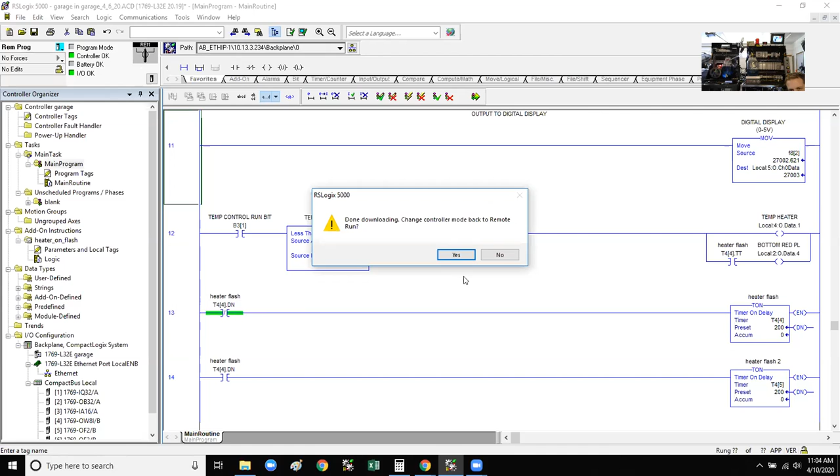Oh yeah, no, it's 4-4 on 13. Should be 4-5. Right, I'd be glad to be wrong, though. So we'll just try it and see what it does. No, you're right, let's edit it.

So, go to run. It's okay, go to run. Double click rung 13. And then change that to T45, you can just type it in. There you go, good. Now go up above where it says output, that green.

There you go, yep, right there. Yep, edits. Yes.

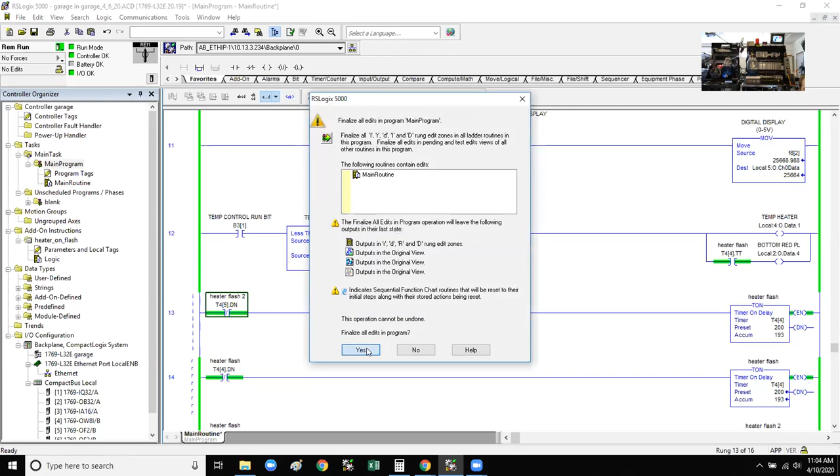Oh yeah, look at that flash. Looks good. I don't even see it flashing. Watch the heater flash down there at T44 done. That's the bit that we're using up in rung 12. You can see it up there in rung 12 in parallel with the temp heater.

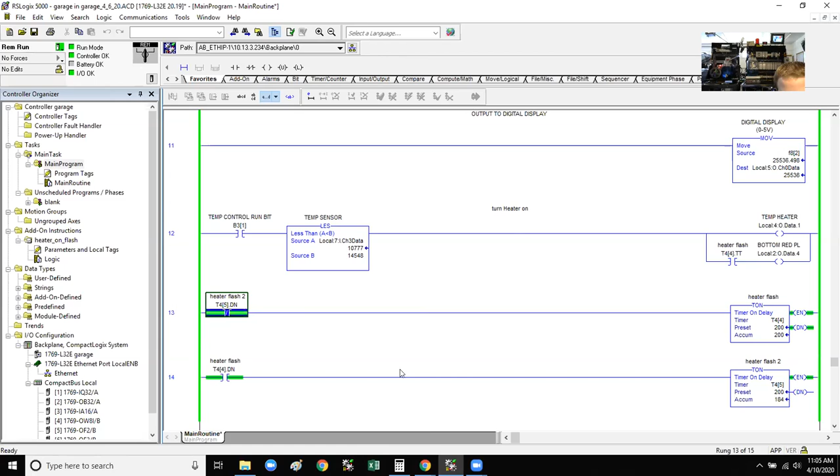Tyler, you just raised your hand. Do you need something? No, I did that on accident, I was trying to click on the chat. Huh? No, I did that on accident, I was just trying to click on the chat. Oh okay, it popped up.

All right, we'll give this a shot. Sweet, look at that. Good, working.

So now we've got the pilot lights going, and the temp heater is heating up. And then Monday we'll pick up on running this fan at whatever percentage it says.

To keep it below 120 degrees, right? Yeah. And after that, when the process is working and we've got it dialed in to keep it between 80 and 120, then we're going to get onto that HMI and program it to do some cool stuff.